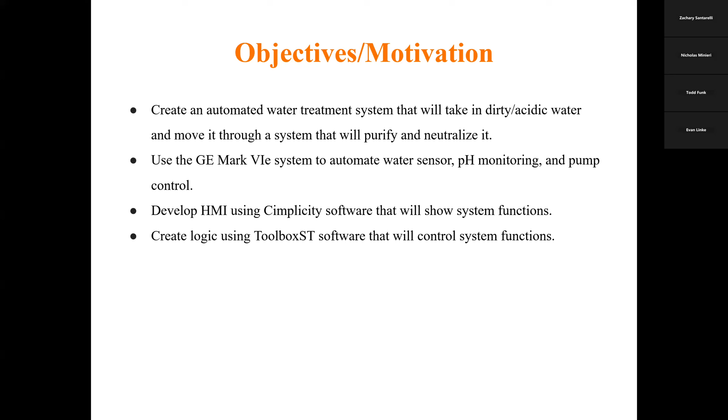We developed an HMI using Cimplicity software that will show system functions, and created logic using Toolbox ST software that will control system functions.

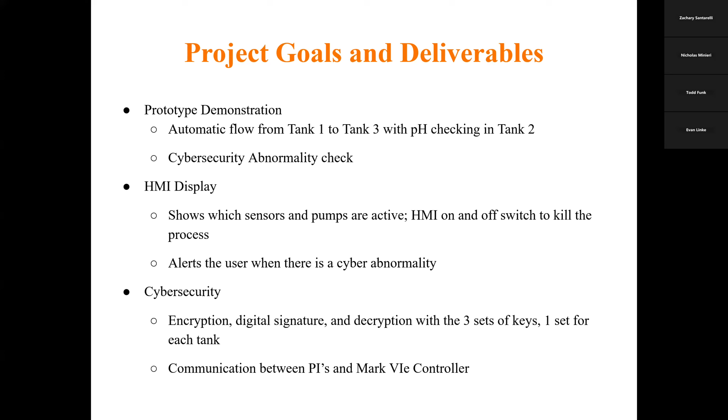For cybersecurity, there is encryption, digital signature, and decryption with 3 sets of keys, 1 set for each tank. There is also communication between each Pi and the Mark VIe controller.

This is Nick again, and I'm going to talk about our project implementation. This is our full system. As you can see, we're technically using 3 tanks, but it's split from 1 fish tank into 3 parts. The system was designed to operate in 3 sections or stages.

The first stage, all the way on the left, is where the dirty/acidic water gets poured in and put through filters, which are 5 and 20 mesh, catching any debris. Then it moves to stage 2, which is the main cleaning stage.

When this tank is full and the water sensor gets triggered, baking soda will be dispensed in iterations to neutralize the pH. There's also a stir rod that stirs and mixes the water to mix that baking soda efficiently. Once that's cleaned and neutralized, it moves to the third tank.

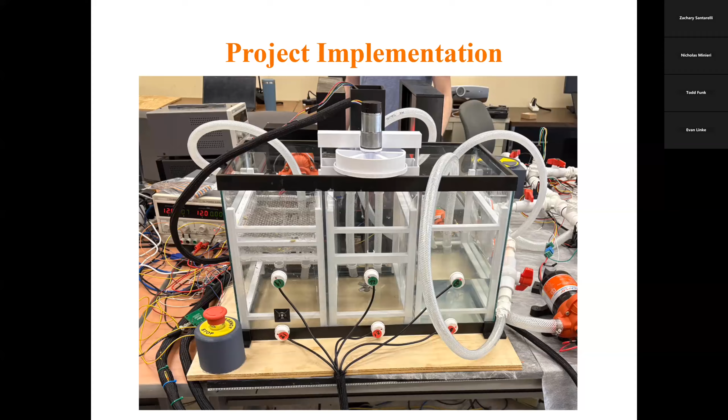The third tank is the clean water and neutralized water reserve. Also, between the pumps, there are 50 mesh filters to clean the water a little more.

This is our emergency stop button. It's wired in series to our pumps, so when this is hit, the pumps will turn off, but the system stays active. It basically pauses the system so we can figure out what's going on.

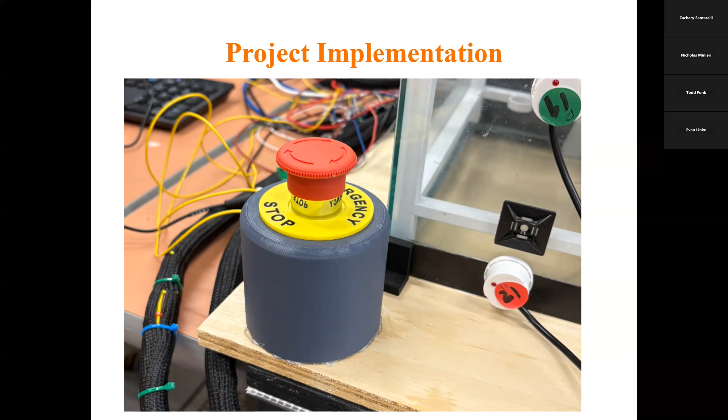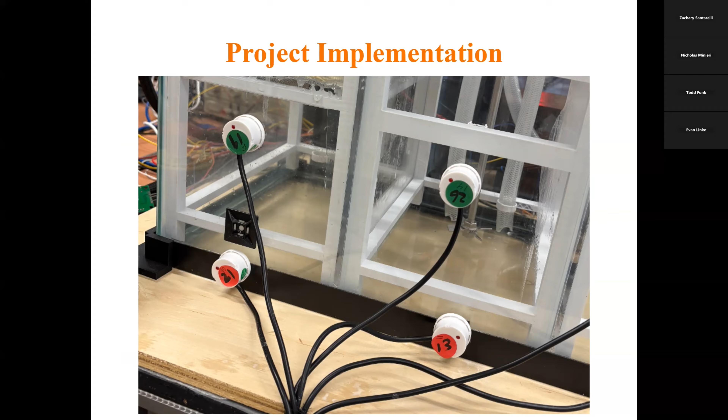Then we have our water sensors. These are placed on the low side of the tank and also at mid-level. This determines the water level: low, high, full, or empty.

Then we have our mechanical stir rod. This is a DC motor put inside this unit that will help stir the baking soda in the tank.

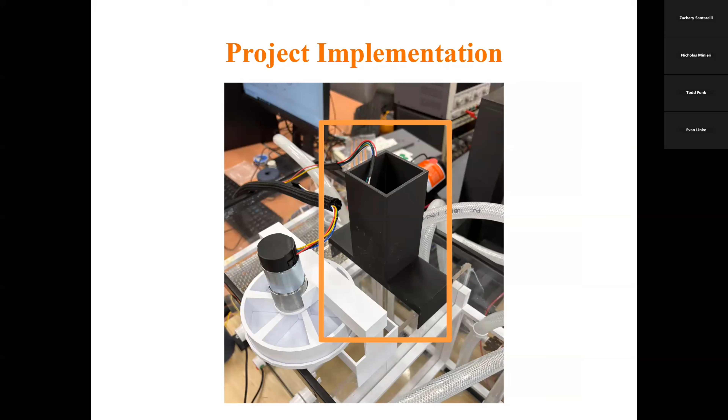Then we have our baking soda dispenser. There are 6 little units that each hold about 2 tablespoons of baking soda. As the water needs more baking soda, the DC motor will turn on, pour a bit more baking soda into the tank, and then turn off.

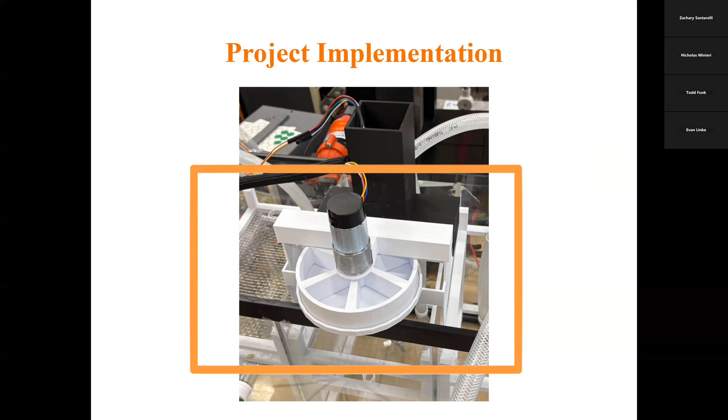Then we have our pumps. We're using the Seaflo 24-volt DC pumps. These just pump the water from one tank to another.

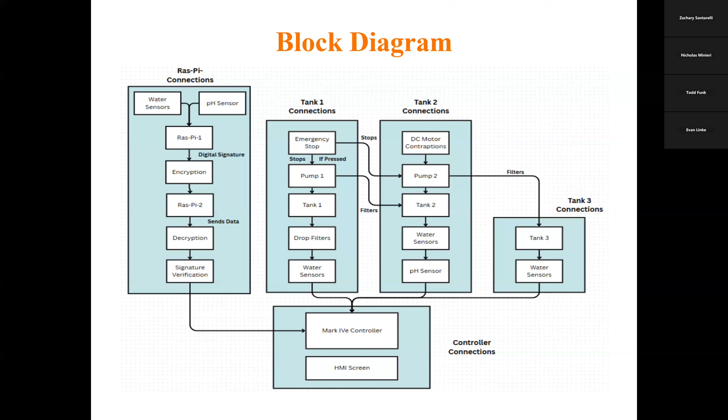Hi, this is Zach Santarelli, and I'm going to do a quick overview of the software design.

For our requirements, we had three main things: communication, security, and reliability. For communication, the sensor data should be able to be transmitted between the Pies separately for each tank. The Pies are connected physically using an Ethernet cable, and the system uses TCP sockets to send the data.

For security, the sensor data is encrypted before it is sent between Pies. The packets are signed using a digital signature to verify authenticity, and the system should detect and flag tampering or abnormalities detected in the communication between the controllers and the Pies.

And then for reliability, the system should be able to handle abnormal sensor readings and notify the user. The system should also fail gracefully if there are any issues.

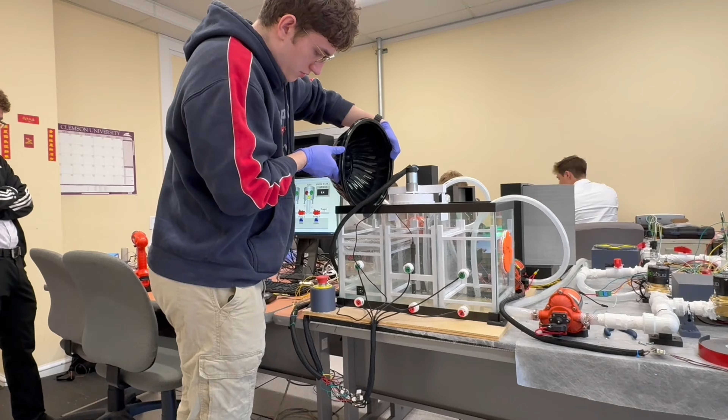First the water gets poured in. You can't really see it in the video, but the bottom sensor gets triggered. Then the second bit of water gets poured in right until the top sensor gets triggered, which signals the system to start pumping into tank 2.

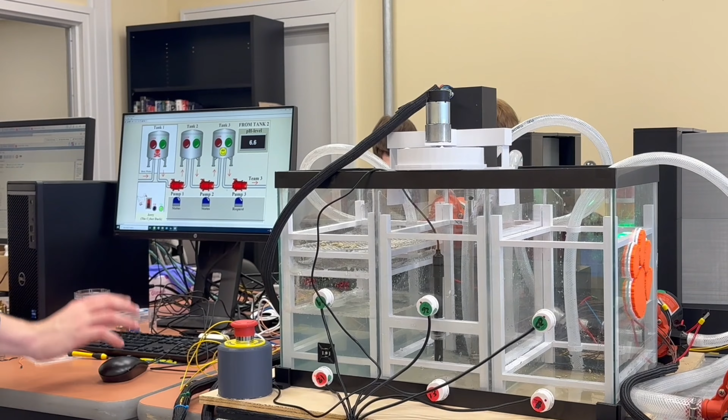If you can see with the mouse, he's selecting the HMI button, which turns off the HMI screen and kind of pauses things where they're at. But that turns back on, and the pump is now pumping into tank 2 until the top sensor gets triggered.

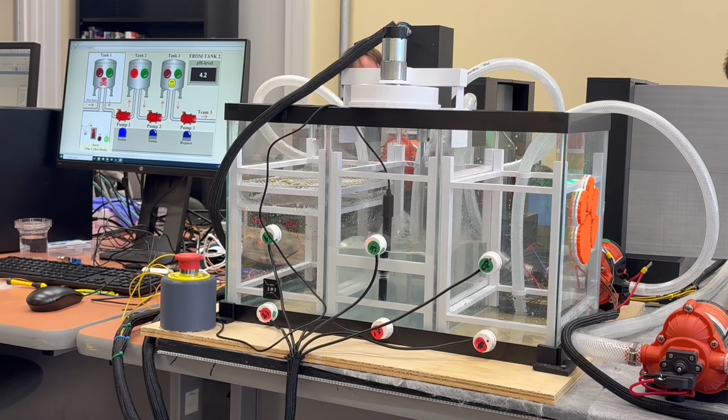And it does. So now the stir rod starts stirring and the baking soda pours a little bit out into the water. If you see on the HMI screen on the left, you can see the pH starting to climb.

That's just because the baking soda is being mixed into the water. That'll keep going until the pH is at a good amount, which our limit is 6.5. So baking soda will keep getting dumped in and mixed until that limit is reached.

And so we're reaching that limit now. We just reached 6 or 6.5, and now the system will say, hey, time to pump into the next tank.

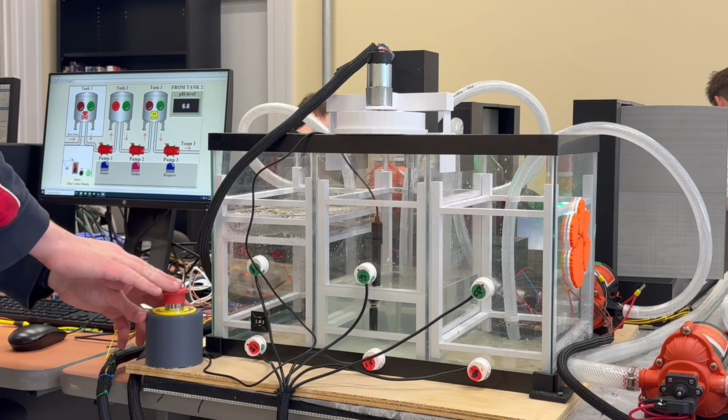Then for demonstration purposes, we hit the emergency stop button, which pauses the pumps from moving, and then turning it back on just resumes them.

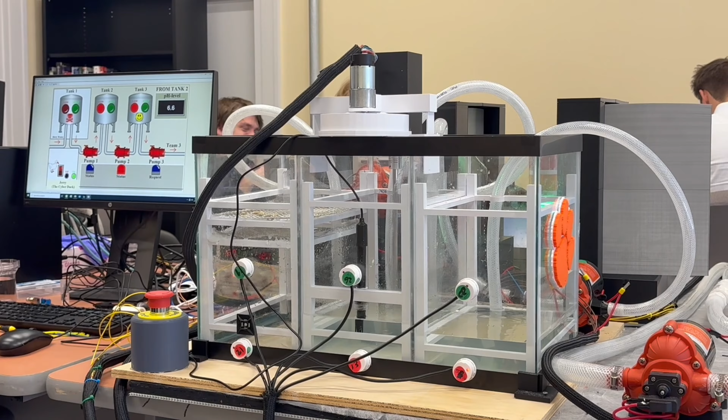Now in the last tank, there's clean water and neutralized water. That pumps up until the high level sensor is triggered, and just like that, the system will stop.

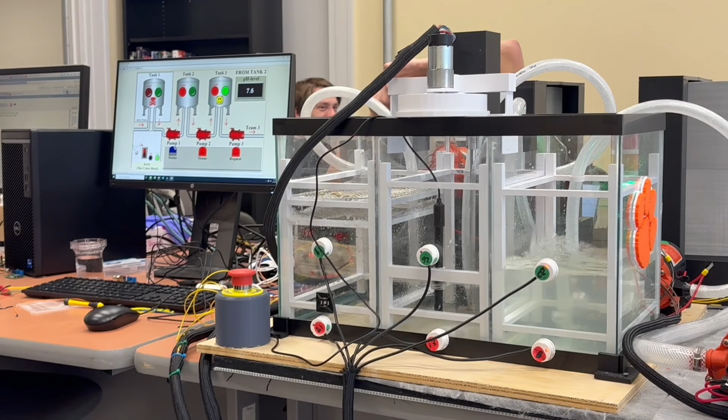This is a quick demonstration of the cybersecurity feature. There's an abnormal state where two separate low sensors are active at the same time, and the Pi shows that on the screen.

Here is just a quick sped up recording of our HMI. As you can see, there are 3 tanks. On each tank, there is a low and high sensor indicating low water and high water.

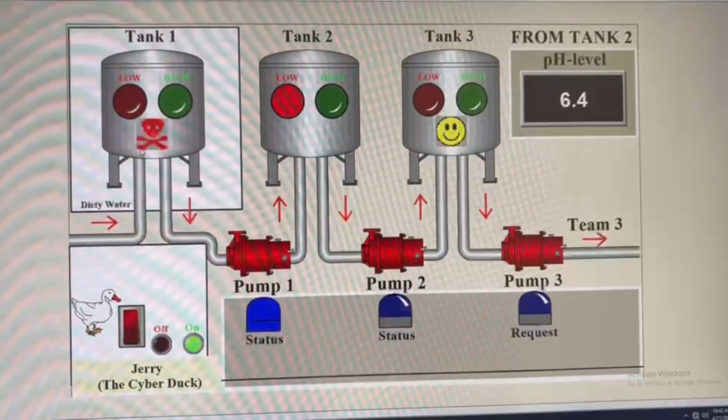In tank 1, once the high is reached, the pump 1 status will go off, indicating that pump 1 is now transferring water. Once the high in tank 2 is reached, the status for pump 1 will go off. Then in the top right, once the pH is between 6.5 and 8.5, pump 2 will start transferring water and the status will go off.

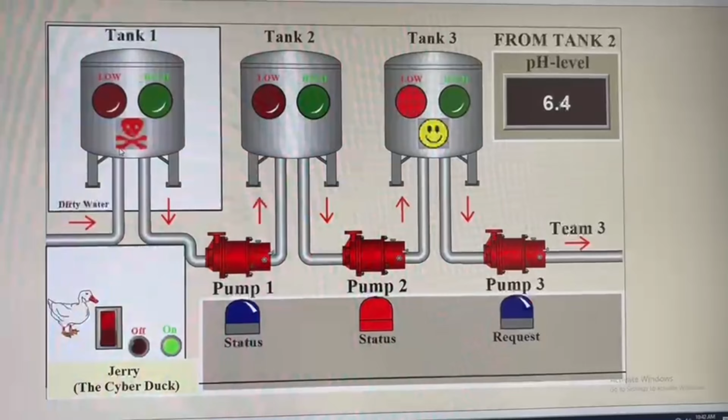Finally, once the high water sensor in tank 3 goes off, the pump 2 status will go off and the request status for pump 3 will go off.

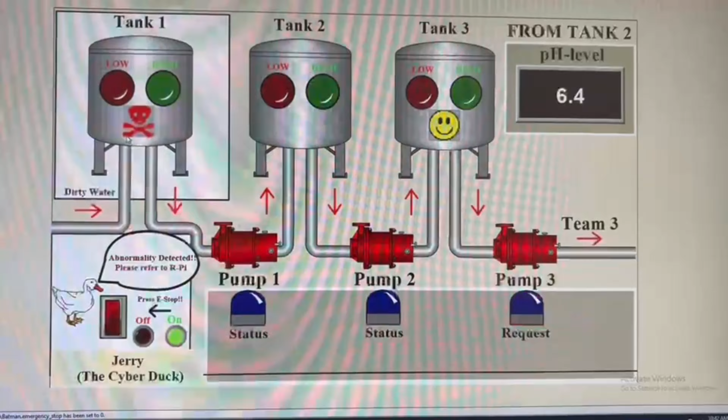In the bottom left, if 2 high water sensors go off at the same time, it'll say abnormality detected and to refer to the Pi, as well as to press the e-stop. If you switch the little switch I pointed to, it'll show that the pumps are off, meaning no more water will be transferring.

Hello, I'm Evan Linke, and I'll first be discussing the results. The first thing I want to bring up is the successful integration of the Mark VIe controller. We were able to accurately integrate the controller and effectively utilize and manage the water treatment process. The logic was designed and implemented using the Cimplicity software, and it was reliable and worked very well.

Accurate water level detection: the water sensors were installed at the bottom and the middle of the tank, and the integration of these allowed us to provide accurate detection of the water level in each tank, enabling the automation process to work effectively.

The automated pH monitoring and adjustment system is done with the pH sensor and the baking soda dispenser. This system allowed us to manage the pH of the water in the second tank, allowing us to then transfer it to the third tank where it was neutralized and clean.

The reliable water transfer between stages was done with the motors, which are the pumps. The real-time system monitoring was done with the human-machine interface, also built in Cimplicity. This displayed real-time system status including tank levels, pH readings, pump statuses, and alarm conditions, improving usability and situational awareness.

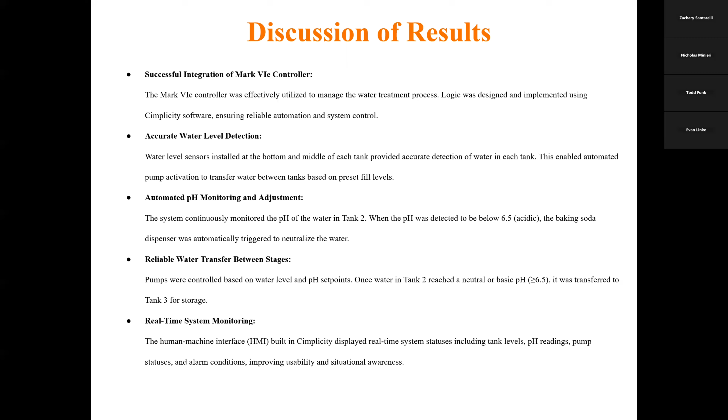Moving on to the challenges and bottlenecks. Some issues we had were pump wiring connection issues; the repositioning of the pumps during the assembly and disassembly of cleaning the tanks and various other things caused some wires to come unplugged or misplaced. We also had issues with controller access delays.

Sometimes other teams would be checking out or using the controllers at the same time as us, and this caused them to be slower or sometimes even completely locked out of the entire system, where we'd have to message them directly to resolve it. We also had Raspberry Pi issues.

The Raspberry Pis got corrupted sometimes, and we quickly learned to back up our code so that we were able to pick up where we left off. We also had 3D printing adjustments; multiple iterations had to be done of 3D printed components because the dimensions would be off, or there would be tolerances in the printing methods.

Last but not least, the chemical dosing calibration. We had issues with the pH sensor where it would be exposed to too much of an acidic compound for too long, causing almost corruption. If it wasn't cleaned correctly, it was very finicky and sensitive, and would have issues.